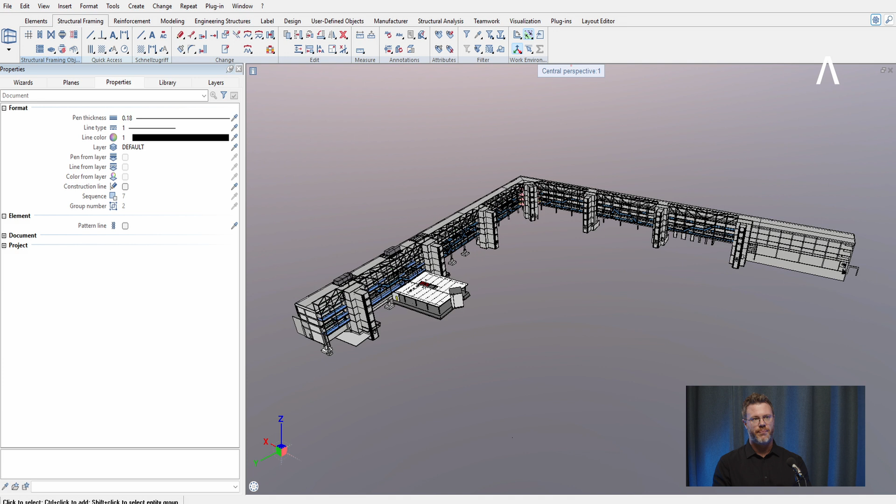The first project I would like to present to you is dedicated to the revitalization of an existing building. 8 steel frames, each approximately 40 meters long and 3 meters wide, are suspended between the existing stair cores. The structure will create additional office spaces, integrate new staircases which reduce the walking distance between floors, and also provide new lounge areas. At the rear side of the building, narrow steel structures will also be installed, serving as a green facade or textile facade.

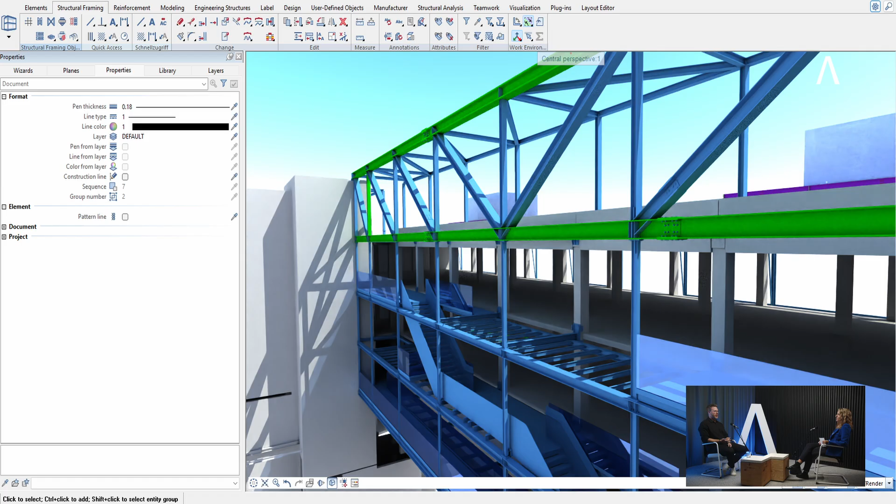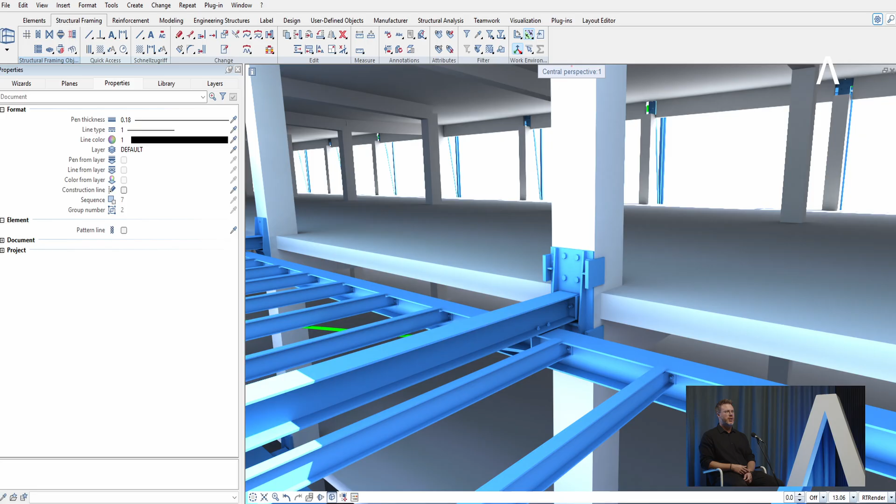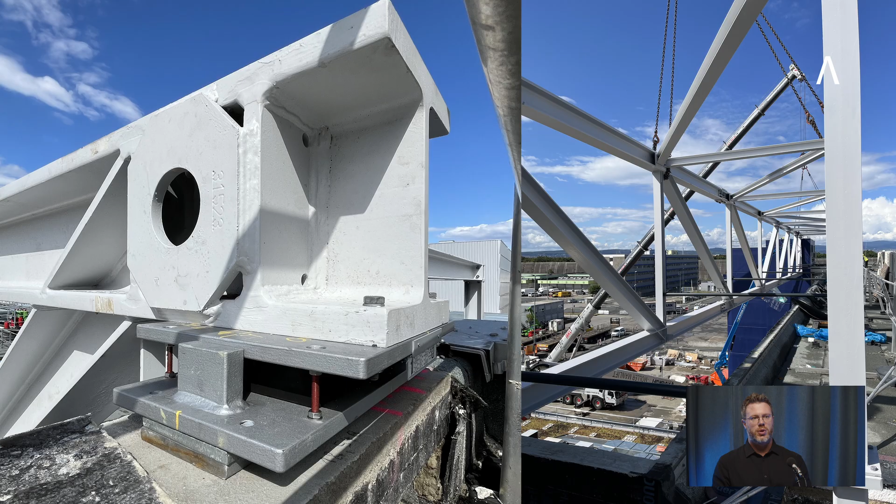Initially, we started this project using another CAD program and its steel detailing module. However, we soon switched back to ALLPLAN. We needed a flexible and intuitive design tool for highly detailed and complex connections. In ALLPLAN, we were able to implement these requirements optimally. For certain connections, we used the connection toolbox and the automated connections, but the majority of specialized connections were modeled using user-defined architectural elements due to their complex orientation.

We are particularly excited about the upcoming enhancements with parametric or automated connections in ALLPLAN, also with regard to SDS2, even though I don't know how and whether it will be integrated. We hope that it will significantly simplify connection designs, especially for standardized connections, while at the same time offering a high degree of flexibility in terms of configuration options.

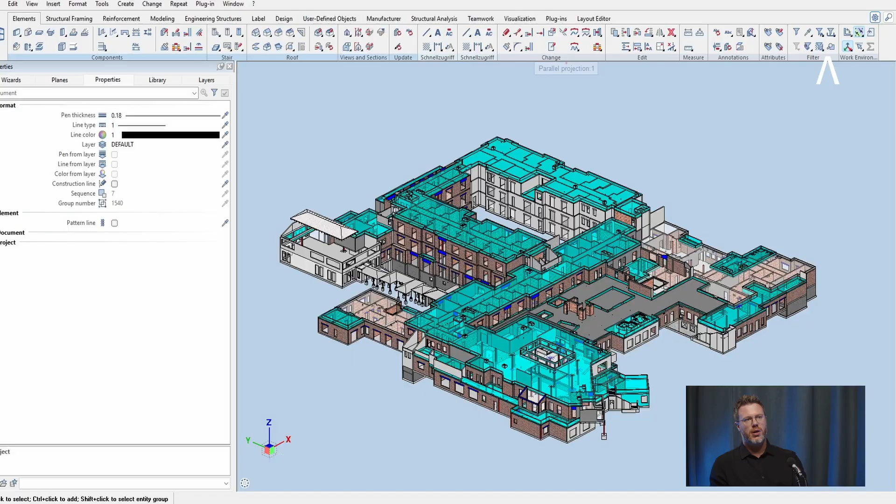The second project is more traditionally structured. We cover the service phases 1 to 6 according to HOAI, the German fee structure for architects and engineers, and produce general arrangement drawings, formwork, and reinforcement drawings in ALLPLAN.

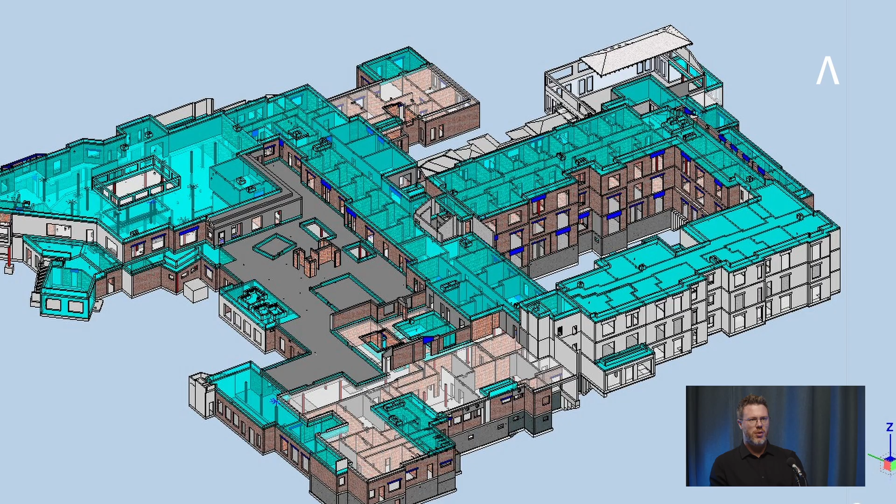A particular aspect is that this building had already been designed and realized at another location using an older version of ALLPLAN. Now the client has commissioned it again with several optimizations and at a different location. This required a new structural analysis, as a result of which the corresponding plans also had to be adapted. This is where ALLPLAN's advantage became apparent.

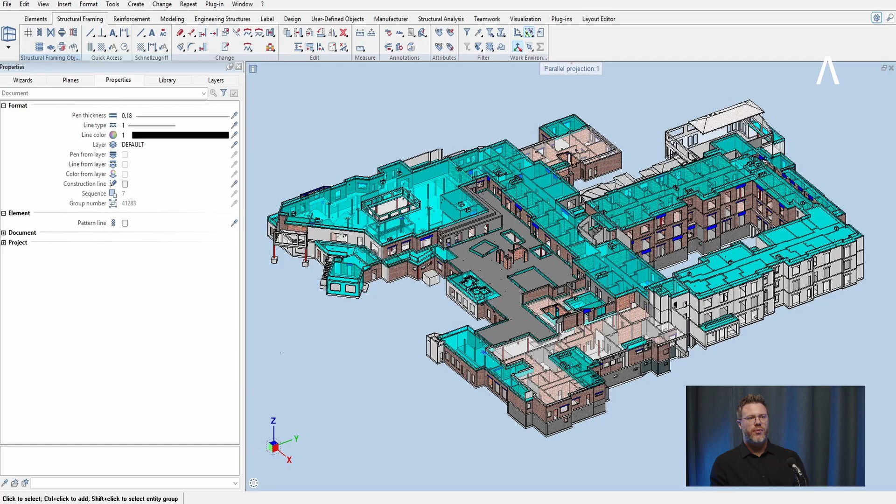Thanks to cross-version compatibility, we were able to adopt the existing planning without starting from scratch. The flexible adjustments in the drawing files and layout editor enabled us to implement changes accurately and efficiently. We made extensive use of automated reinforcement functions within customized detailing.

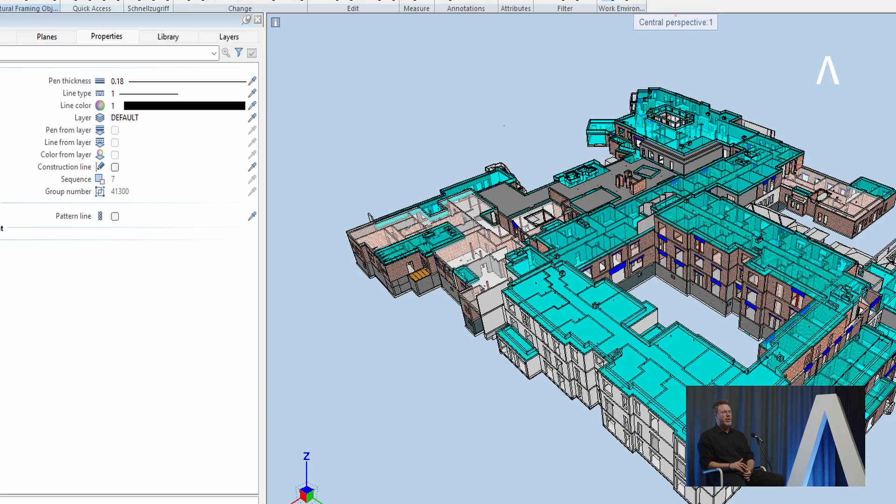This had already worked very well. The basic reinforcement could be laid solidly and quickly. Only minor reworking was required, which saved us a lot of time.

We are particularly excited to see what new features will be added in the future, especially with regard to how automatic reinforcement will behave, for example in the case of subsequently modified openings. This project is still in progress, but it is already clear that ALLPLAN allows us to reduce planning effort, ensure consistent documentation, and guarantee the quality of deliverables.

Thank you for sharing these great insights of this amazing project. It's really good to hear that ALLPLAN was a tool supporting you with the daily workflows in achieving this accuracy on documentation and boosting productivity. I can tell that with the 2026 version of ALLPLAN, we will deliver enhanced and new workflows for automated reinforcement.

That's very exciting. And now maybe you wanted to tell us more about this third project you're bringing today.

Of course. The third project is the construction of a new office building with a total of 3 basement levels and 4 upper floors, for which we implemented both reinforced concrete and steel structures. A special feature was the connection to the existing building.

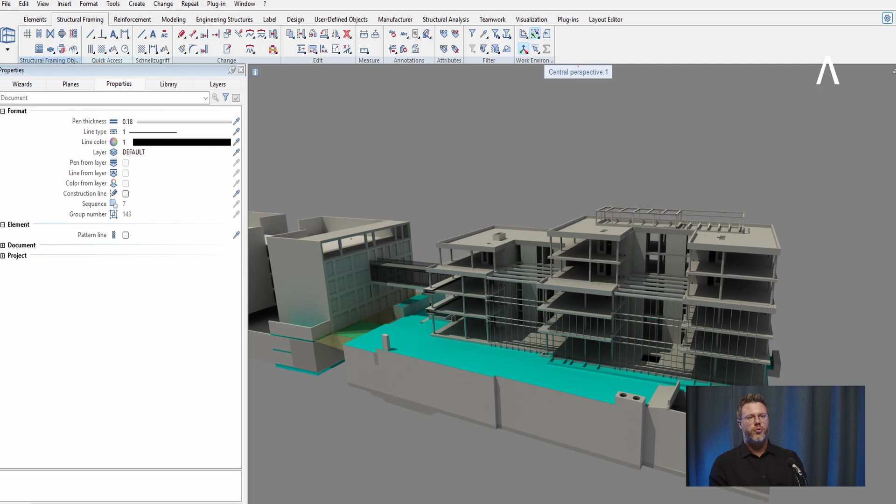Our scope of work included complete structural design, producing general arrangement and construction drawings, as well as formwork and reinforcement drawings. Once again, ALLPLAN proved to be a powerful tool. The software enabled us to generate precise formwork and reinforcement drawings, while seamlessly coordinating interfaces with the steel construction.

ALLPLAN's flexibility in detail editing and layout adaptation was particularly valuable. It enabled us to efficiently coordinate complex building details and document them in high quality.

This project is a great example of how ALLPLAN can be used to successfully implement classic building construction projects in solid construction and steel construction connections at the same time, from planning to execution.

Thank you for sharing these great details of this project. I need to say again how amazing it is to see how ALLPLAN solutions really support the engineer's daily work. I also see you're using the multi-material approach for different structures, including here the steel structures and the connections.

It's really impressive, and we love to see these project examples and see you're happy with the tool you use. Yes, all 3 projects demonstrate how ALLPLAN supports our daily workflows, whether it concerns revitalization with complex steel structures,